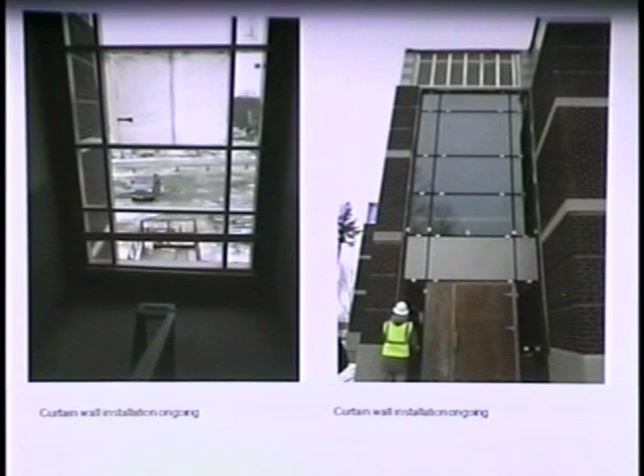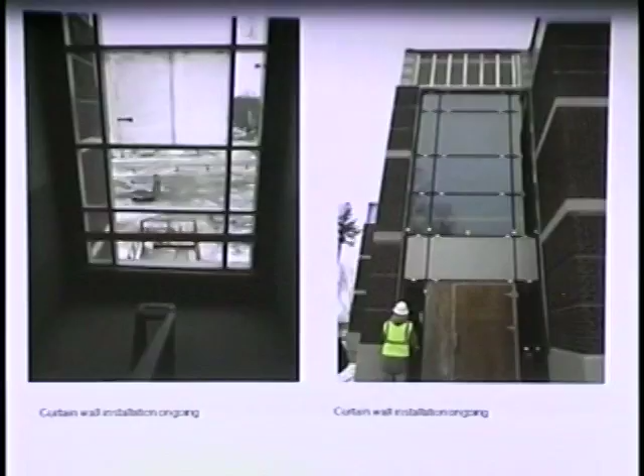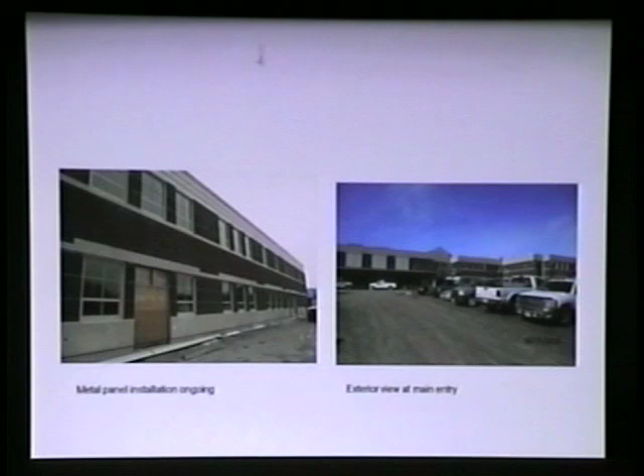Curtain wall at the stairs on the left is ongoing. And from the outside, at this time, I think the caps have been installed, and the metal panels up above have been completed as well. So you can see here some more metal panel photos. This was the last piece, one of the last pieces of the exterior skin to be installed, and you can see also at the main entrance the metal panels on the end of the lobby there.

Boiler room fit up on the left. All the boilers are in. They're scheduled to be started this week, or next - test startups coming in the weeks ahead - very soon, imminent, as well as the hot water boiler system heaters.

And you can see the ceramic tile in the corridors ongoing. We don't have lockers yet, but most of the ceilings have been installed now and filled with tile.

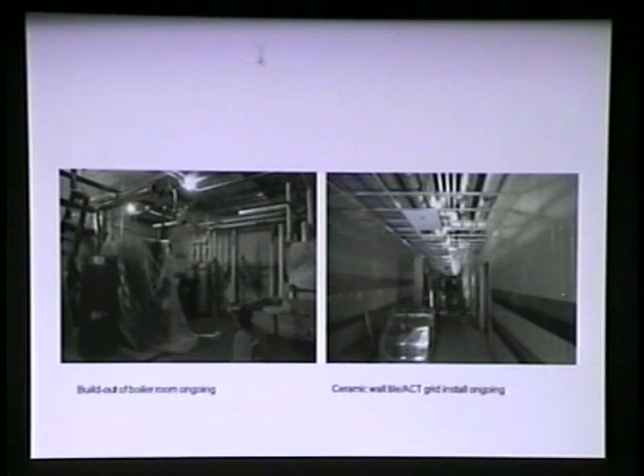At the cafeteria here, you see the proscenium opening and some light fixtures, and this has progressed more since that. I have another slide showing some more recent progress.

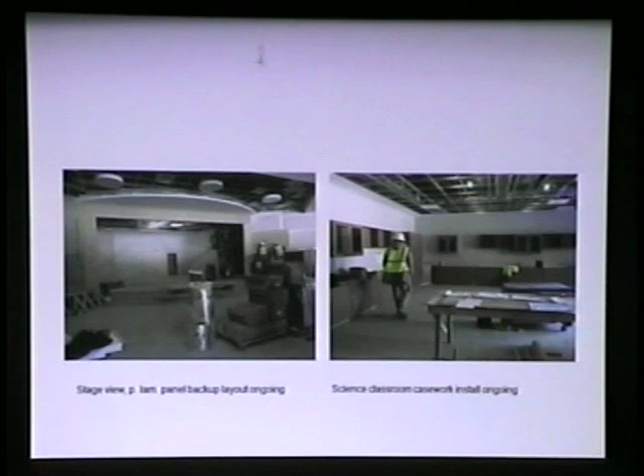Science casework in the labs has all been installed, I believe, and epoxy resin tops have been installed on top of these cabinets as well. Casework in pretty much all of the classrooms is either complete or ongoing.

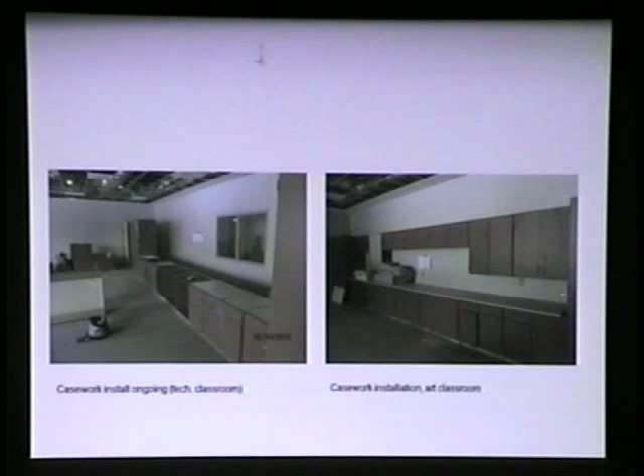This is a recent photo on the left of the gymnasium. You see the motorized divider curtain here. All 6 of the basketball backstops have been installed, and the wood flooring system will begin shortly.

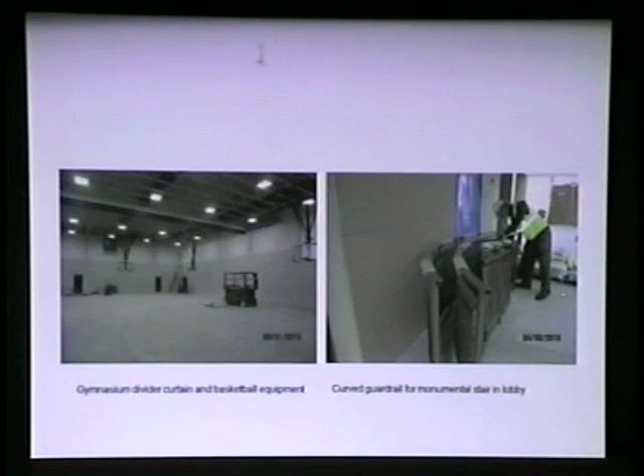This is on the right, the curved guardrail at the monumental stair in the lobby, and those have since been installed, and you'll see that on this slide on the right here.

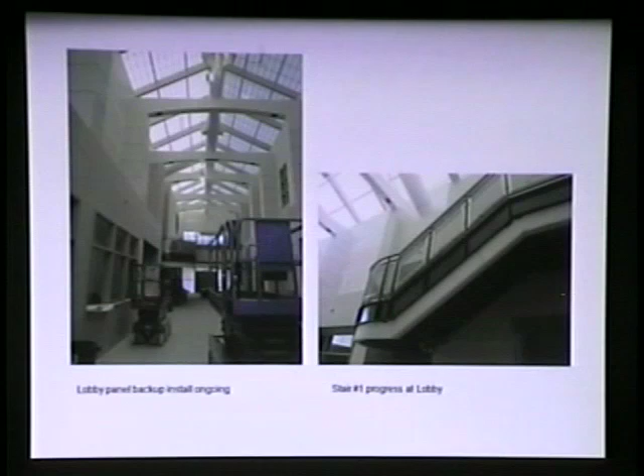Backup panels for the plastic laminate panels have been installed, and those will be installed shortly. So you're looking back toward the stair number 1 here and the soccer field, multi-use field beyond.

Again, more casework, epoxy resin, lighting fixtures at the cafeteria, and a more recent slide of photo of the cafeteria where they've actually started to install the plastic laminate panels.

So all the ceramic tile finishes have been installed around the perimeter, plastic laminate panels around this band here, and then the backup for the acoustical panels that go up above that.

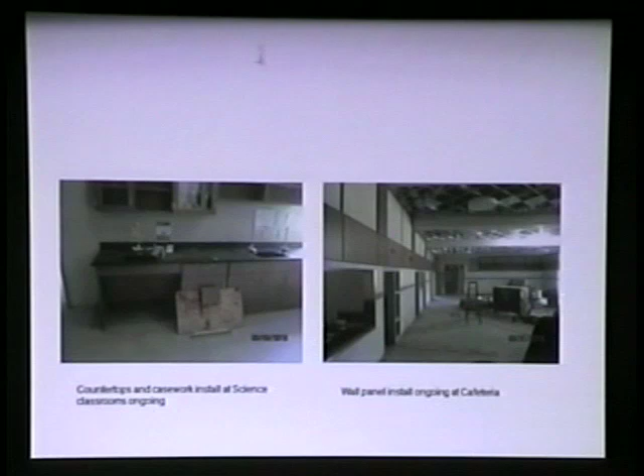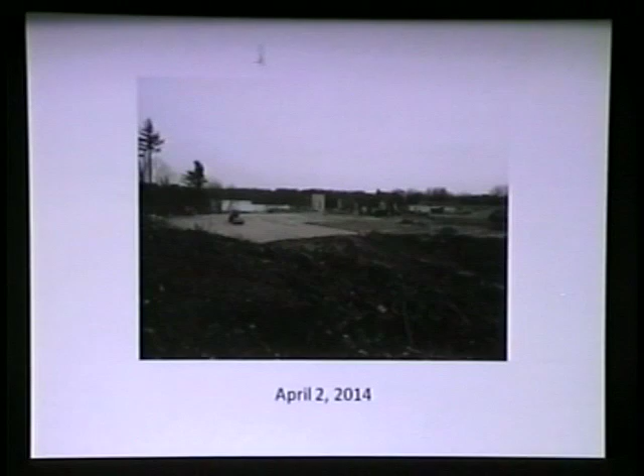And I included a photo of where we were a little over a year ago. This was April 2nd, about a year and 5 days ago, so it shows a lot of hard work has gone into the past year to get from this to where we are now. So, good job, everybody.

If you were here last week, we walked through the lobby, we walked through the building, and we talked about a dedication plaque and where it might be located. This is as you walk into the lobby, and if you turn right immediately, this is the door into the general office. This is the bay window that projects out from the media center above.

These are small alcoves with the pilasters here, and here. This first one is where we're proposing to locate the dedication plaque. When we looked at it last week, we actually decided instead of locating it on this side of the flat screen display, to reverse and put it over here, so it's a little more visible as you walk in the door. But this is a flat screen, this electronic display.

Where you'll be able to run either programmed messages or the daily announcements or whatnot. There's also some MA-CHPS signage here. As part of the sustainable design process, we're required to have a permanent educational display that describes every single MA-CHPS feature in the building, which, as you know, there's quite a few.

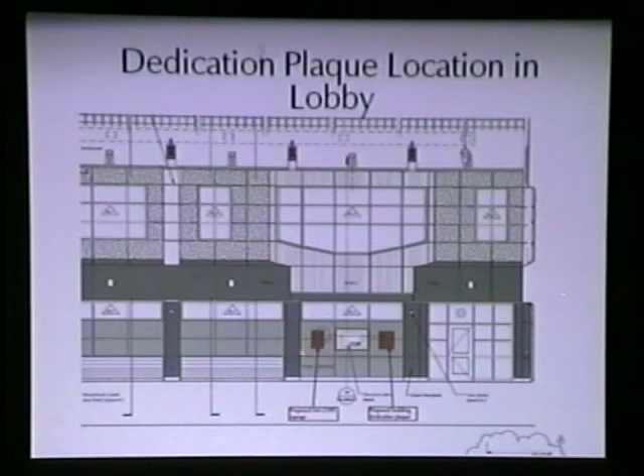But the plaque we're proposing for this location here, I brought along some examples of previous schools that we've worked on and plaques from those schools.